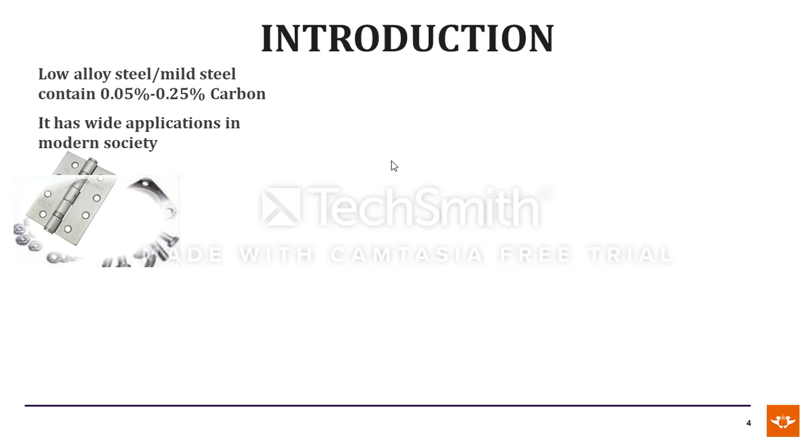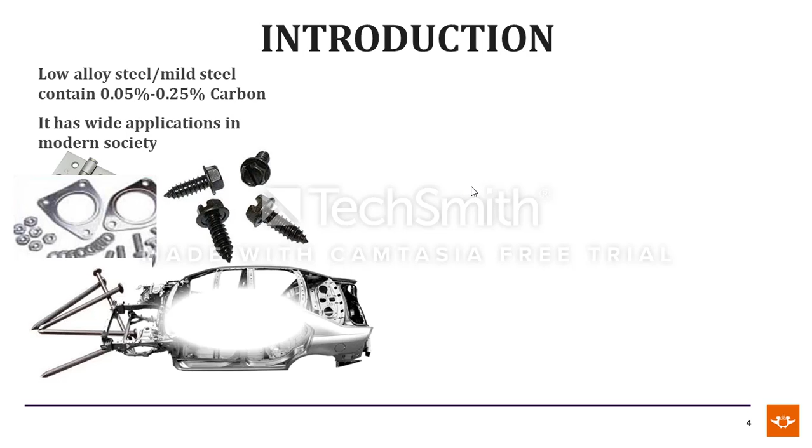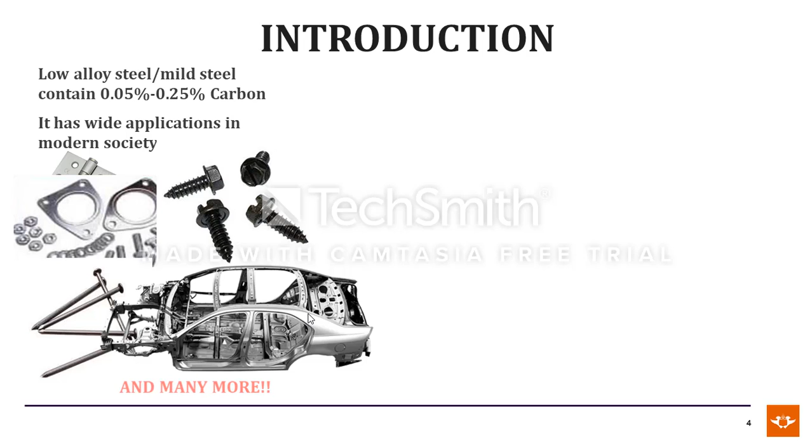So here I'll present to you the mode of presentation, and then next I will give you a background of the applications of aluminium thin films. One of the things is aluminium thin film is used in coating of steels, which are widely used in various applications. And one of the problems with these steels is they experience a lot of corrosion.

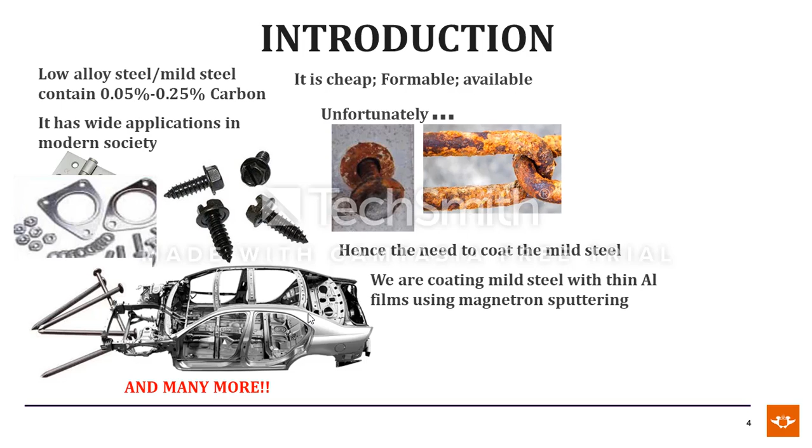So there is need to coat, and mild steel are coated with aluminium films. And one of the ways is to prepare these films through magnetron sputtering. Magnetron sputtering has been shown to produce films with less defects, and the quality of the film is said to depend on various processing parameters, which include the power, the system pressure, temperature, voltage, substrate quality, composition of the target, the temperature of the target, the voltages, and so forth.

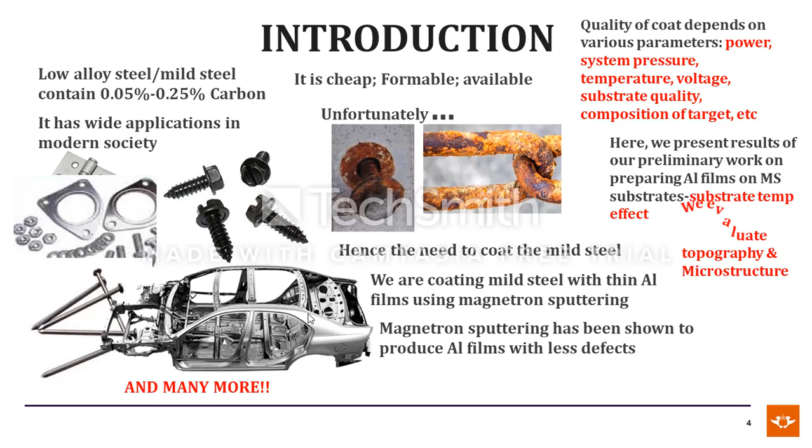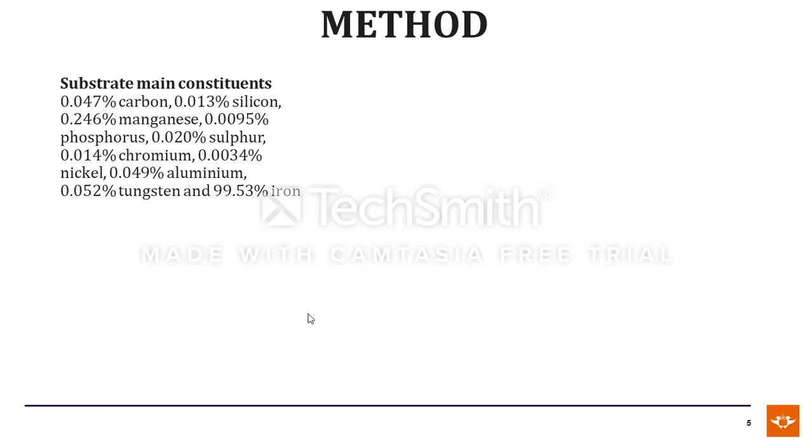So in this case, we present results of our preliminary work on preparing aluminium films on mild steel substrate. We present the effect of substrate temperature, and we evaluate the topography and the microstructure of the films. So in the methodology, the substrate is basically mild steel, one of the highly corrosive, and the target, as indicated, is the pure aluminium of 99.9%.

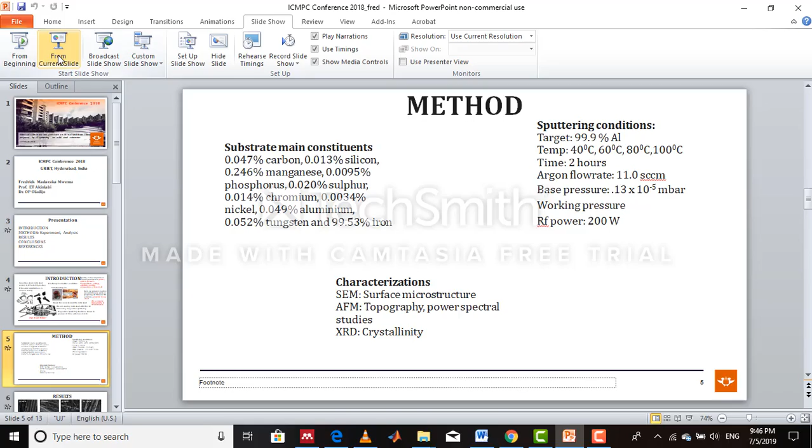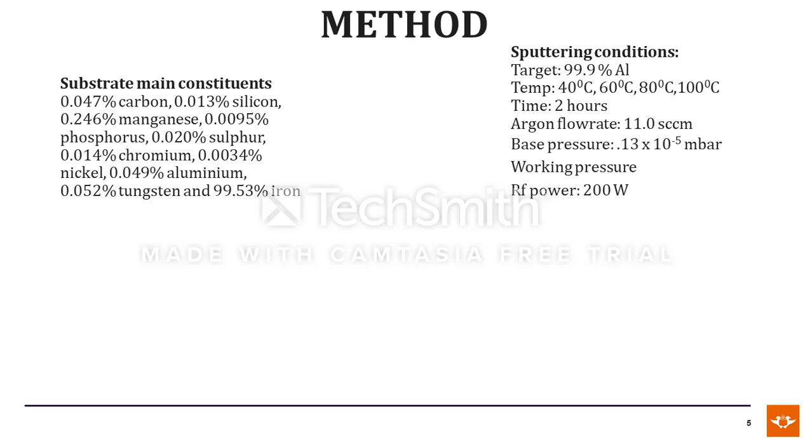So the substrate was kept at varying temperatures of 60, 40, 60, 80 and 100 degrees. We used a constant time of 2 hours, argon flow rate of 11 standard cubic centimeters, base pressure of that, RF power of 200 watts, and the characterizations undertaken were SEM to show the surface microstructure, AFM, and XRD to do the crystallinity.

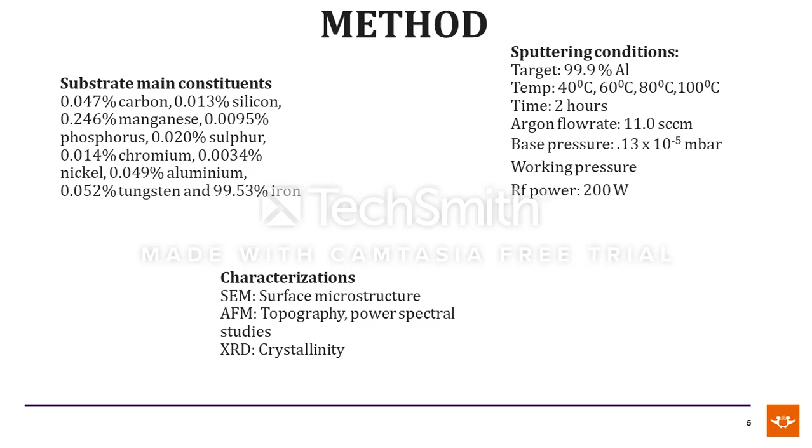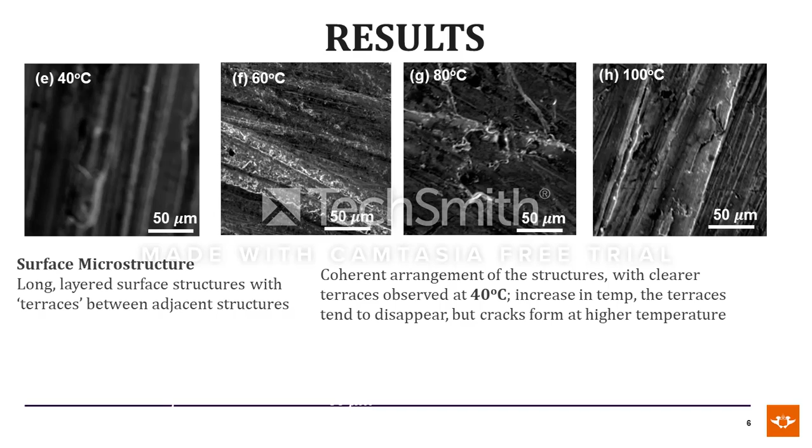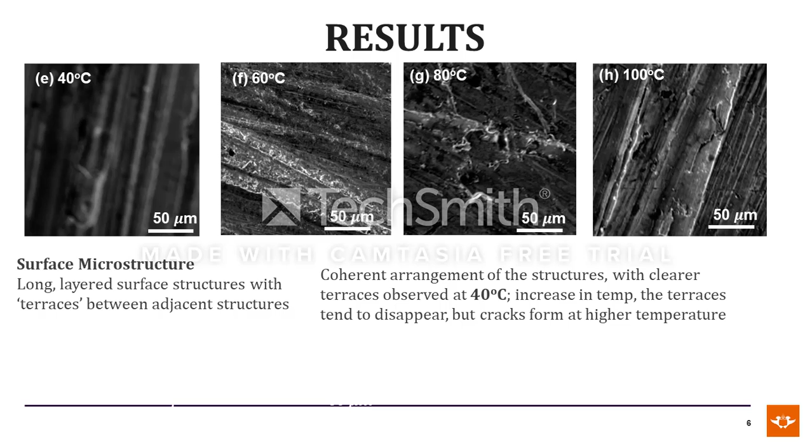As for the results, these were the SEM results, and the microstructure consisted of layered surface structures with terraces between adjacent structures. Coherent arrangement of the structures with clear terraces were observed at 40 degrees, which means by increasing the temperatures, the terraces tend to disappear. These are the terraces I'm talking about. They appear as elongated trenches along the structure, but the cracks start to form at higher temperatures.

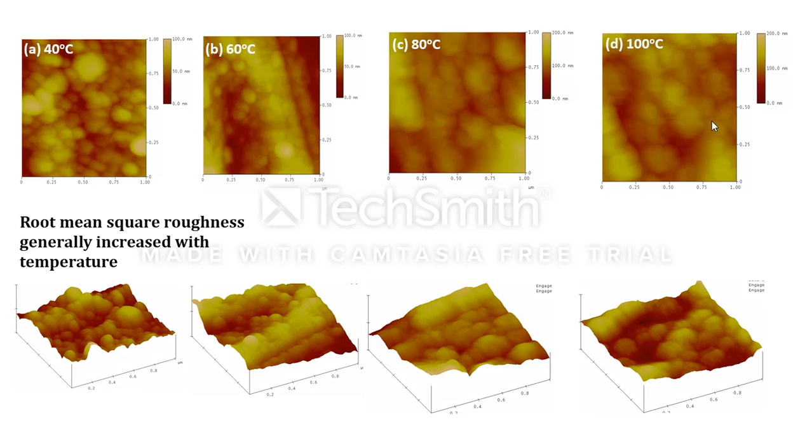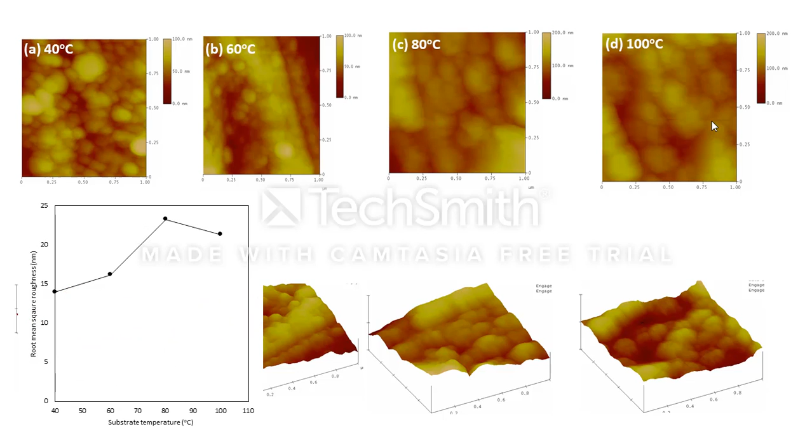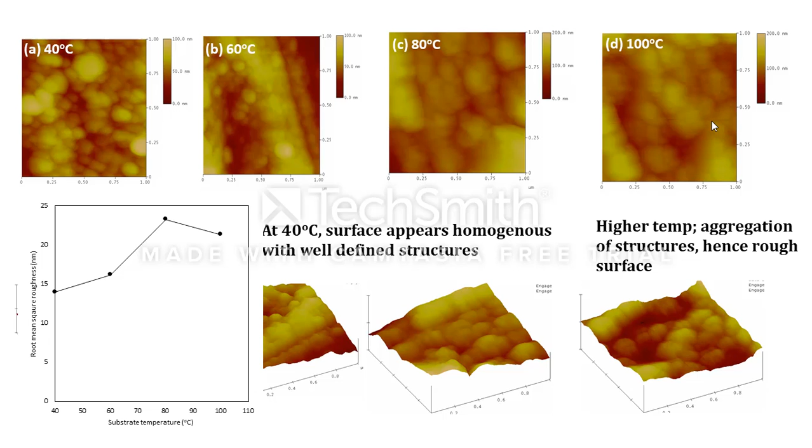The AFM results show that the root mean square increases with temperature, and a plot of that is illustrated. At higher temperature there is aggregation of structures and hence higher surface roughness. Then we did the section profiling, and the structures were shown to exhibit periodic structure, and the lateral sizes shown to increase with temperature.

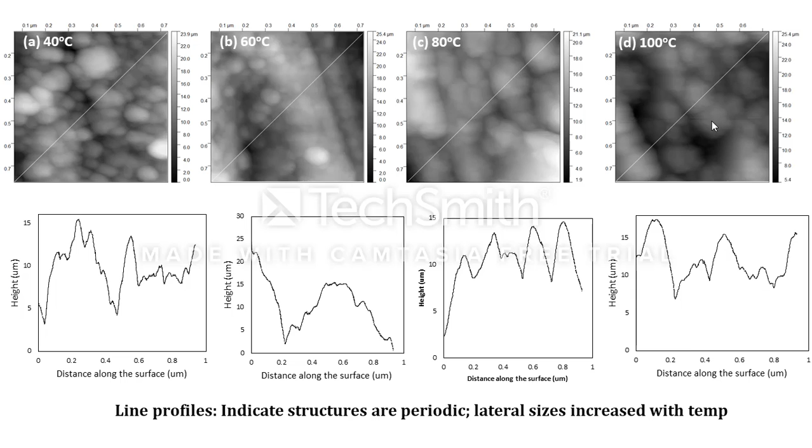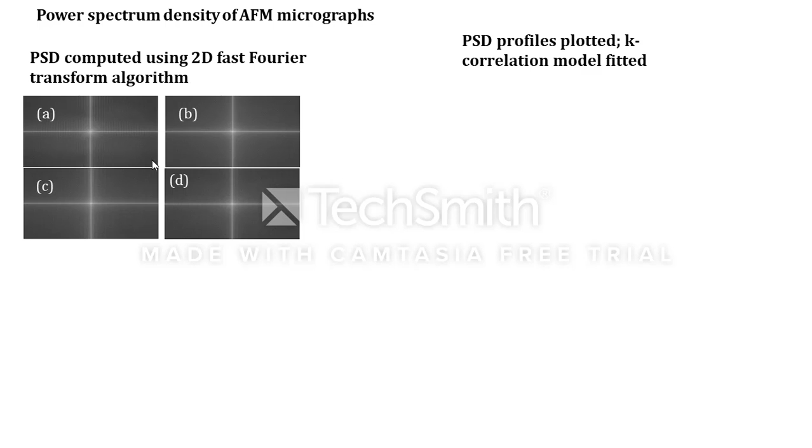As such, we did a power spectral density of the images, and we used two-dimensional fast Fourier transform algorithm. These are the power spectra of the images, with the brighter region showing the low frequency region, and the darker region showing the high frequency region. The PSD profiles were computed, and the k-correlation model fitted as shown.

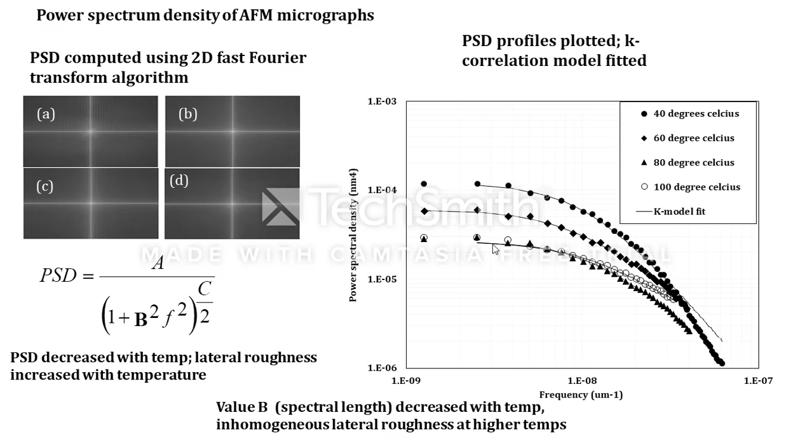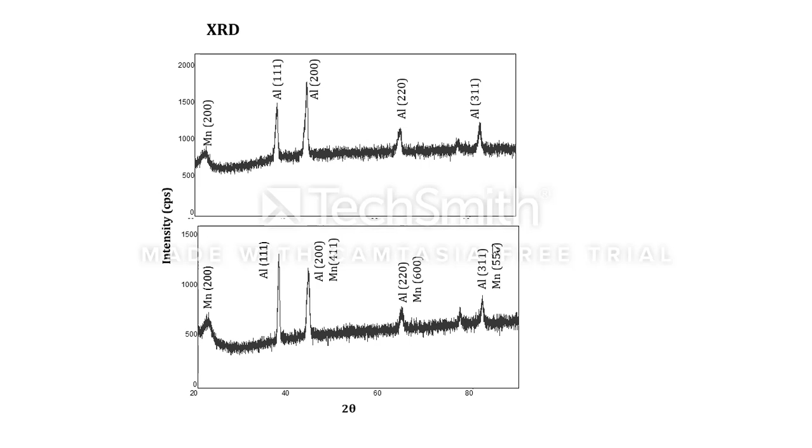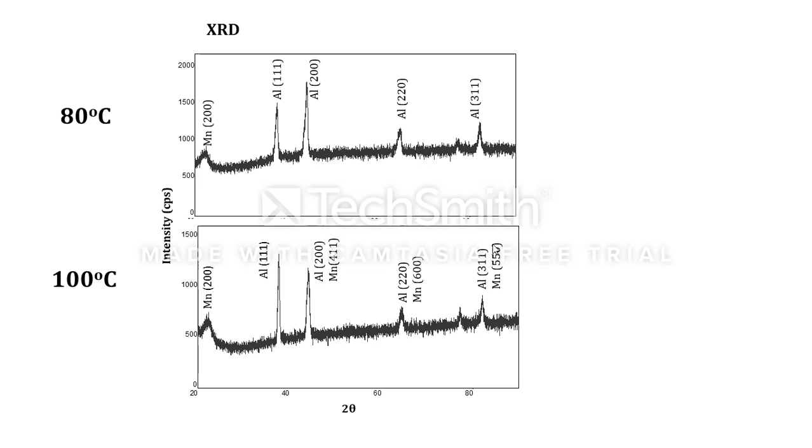The next was the XRD. There is not much about the XRD information in terms of the temperatures, but you can see a bit of crystallinity of the films. The structure at both 80 and 100 degrees are nearly the same, so there is not much change in crystallinity between 80 and 100 degrees.

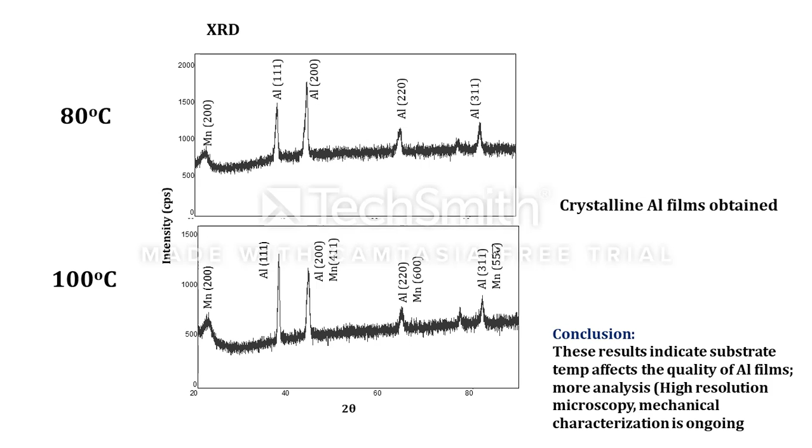If you read our full paper as it is in ScienceDirect, you get to understand how the PSD, especially the correlation length, relates very well with the distribution of the surface structures and the relationship with the microstructure. So thank you very much.